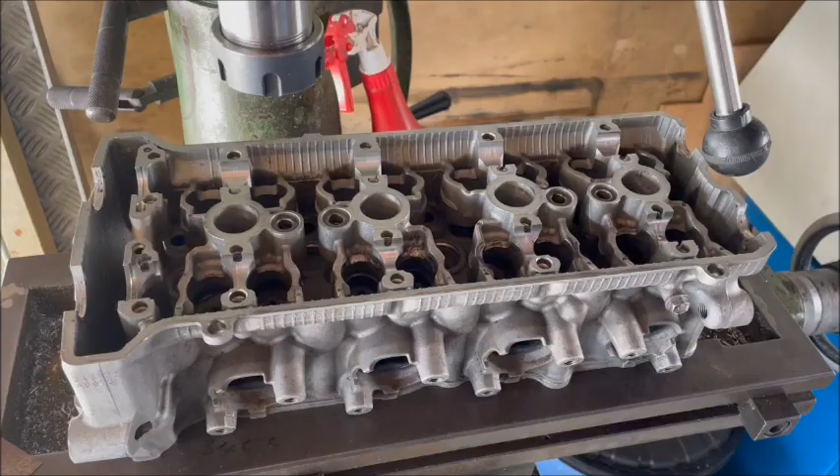So the next little job in the garage is to take 25 thou off one of these heads. Now this head's actually been damaged beyond repair and use, so I have it as a test piece. So the first thing I had to do was remove the damage from the face on the bottom here so it would actually sit flat on my mill, and as you can see it's about the size that this mill will take, and it won't take anything much bigger, but anyway it'll be able

to do it. So what I'm going to do is measure these bores where the cam goes, the bearing surfaces here, to make sure that the head doesn't have a bend this way. I've got to clock it up first. Once I've done that, I can then flip it over and take a cut off this side without clamping it down, putting a bend into it before I make the cut on this side.

So to make sure that with this head clamped onto the mill like it is, that I'm not imparting a twist in it, I've cut 3 little shims. These are 4 thou shims, so they'll go 2 at this end, 1 each side, and the other one will go on this end. So being supported at 3 points, it won't be twisted in any way, and I can make all the measurements. When I've got it flipped over, I'll do the same thing, mount it on 3 points.

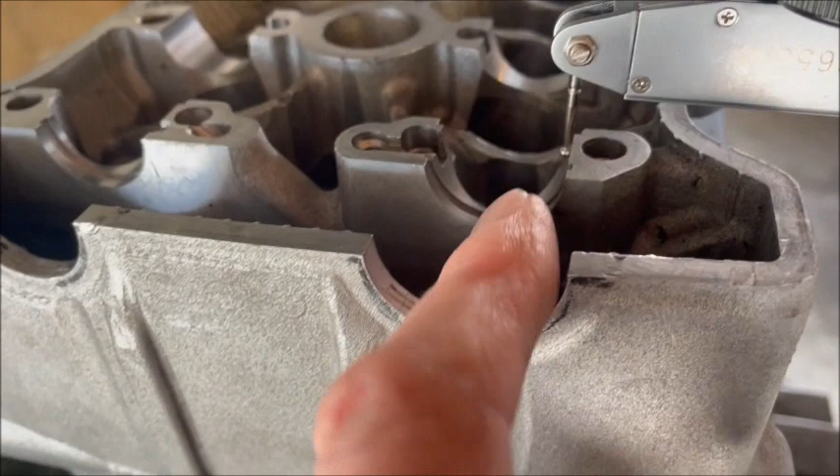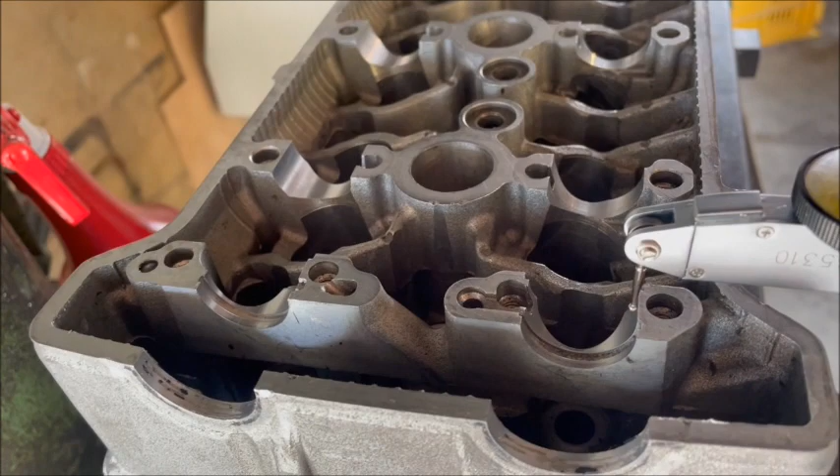Before I can check if the head is bowed in this direction, I need to get it lined up on the mill in this direction. So what I've done is got the indicator on this edge of the cam bores, so that basically it's on the vertical part of the bore or close to it. And so I've got it set to about 20, and if I move along to the other bearings,

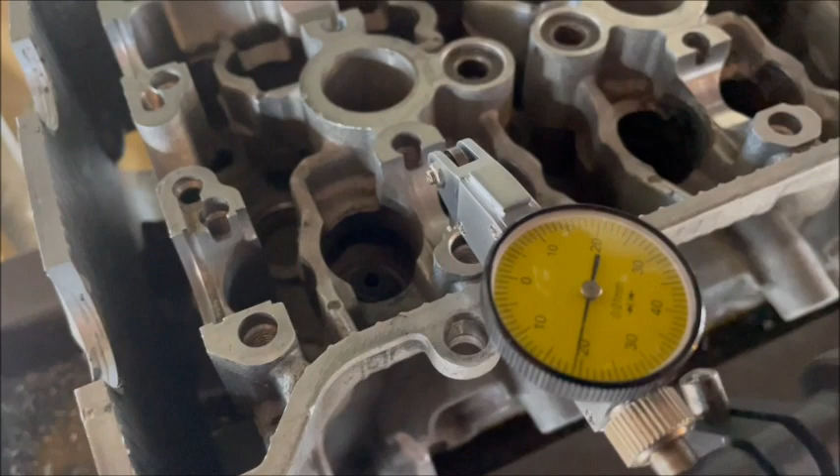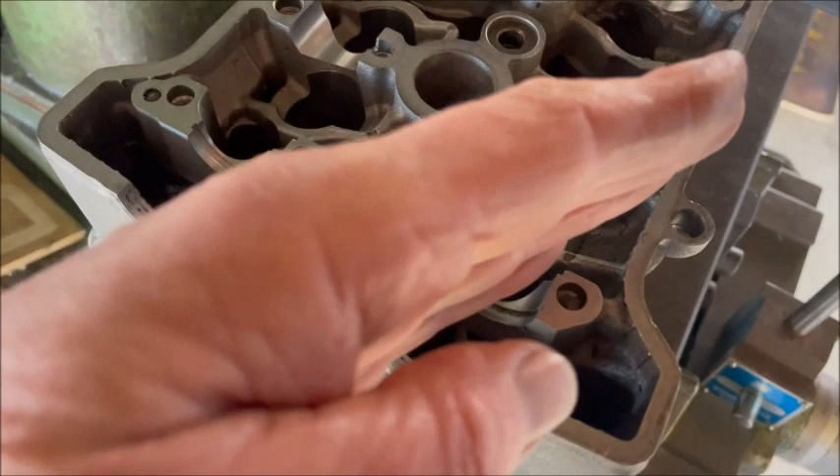it's a bit more gentle here, you can see lines up pretty good. It's not dead perfect, but for this purpose it'll be just fine according to me. Get to this one, won't bother going all the way to the end. I don't need to see the head traversing across my mill. So it's about 20 all the way along, so that's fine. So the next setup will be to measure the height of the bottom of these cam bearings, so that's why I had to get it perfectly straight on this bed.

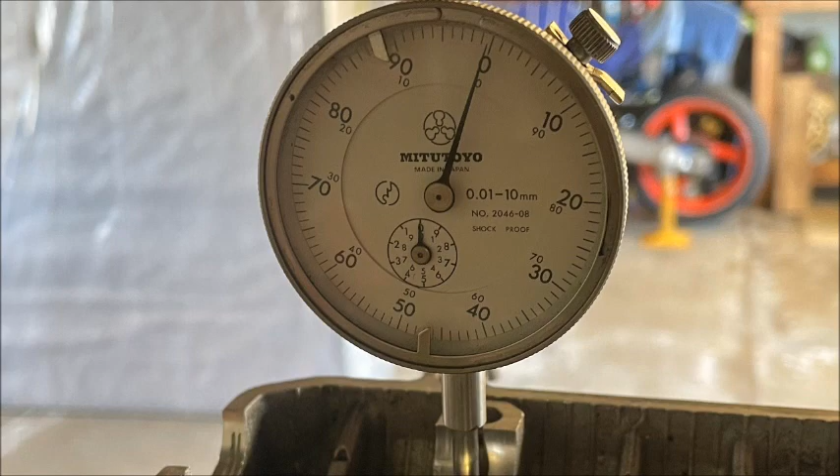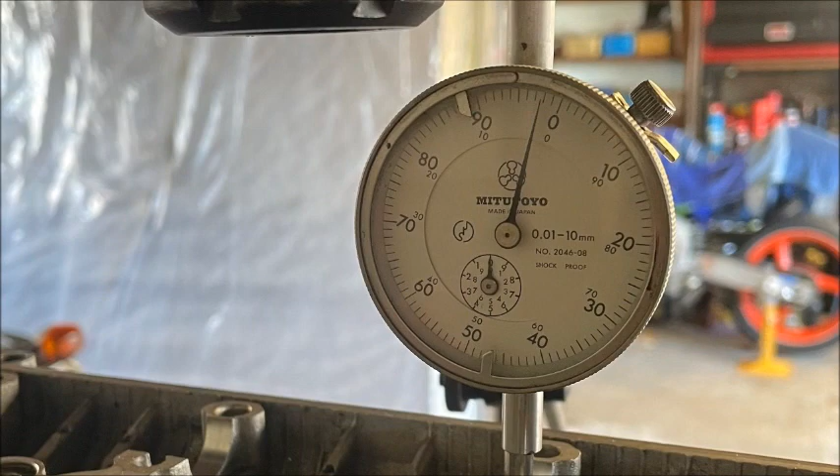In this first photo you can see how I've got the DTI on the bottom of the cam bores. These next photos are of the actual DTI reading in successive cam bores as the head is moved along. So as you can see, there is some slight variation in the gauge, but it's more caused by the slope of the cylinder head rather than a bend in it, so it's progressive.

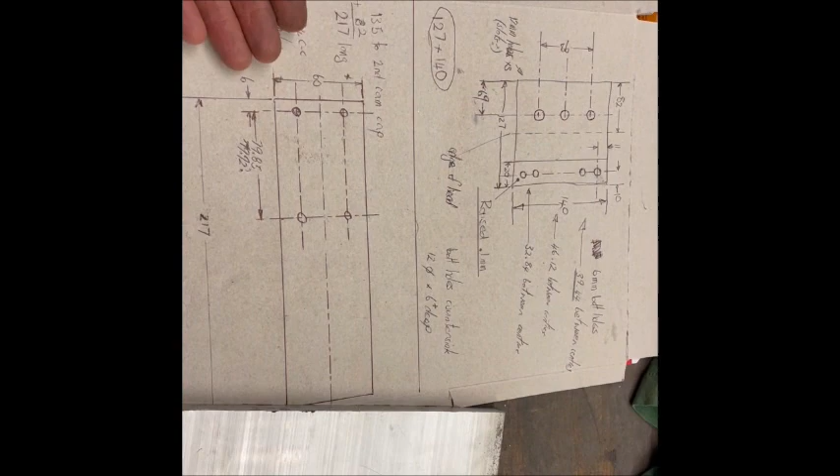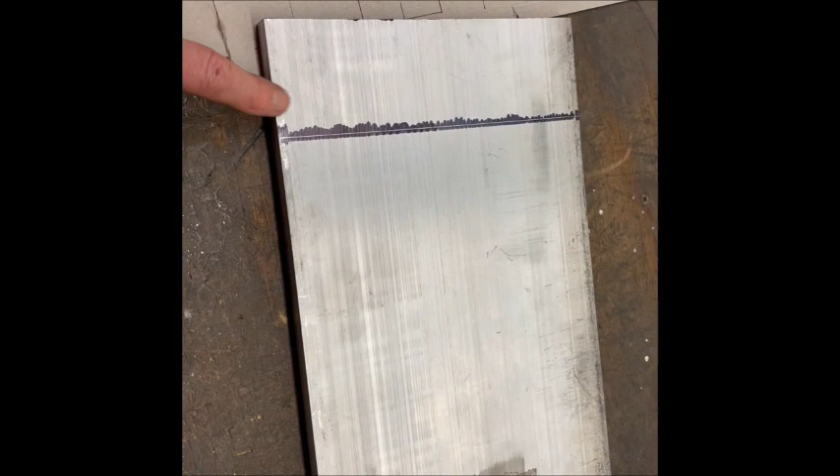All right, I've got a rough plan of the fixture plates I'm going to need to bolt to the head that I can then clamp down on my mill, which will hold it securely, plus also allow me to shim it up so it's all flat and level. So that's the basic drawings, one for each end. I've got a piece of aluminium plate about 12mm thick from my mate Kevin, so I'm just going to cut that off using my drop saw.

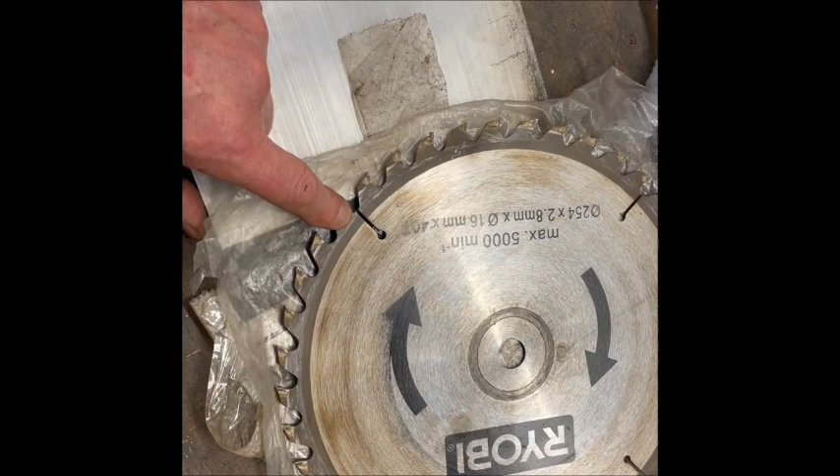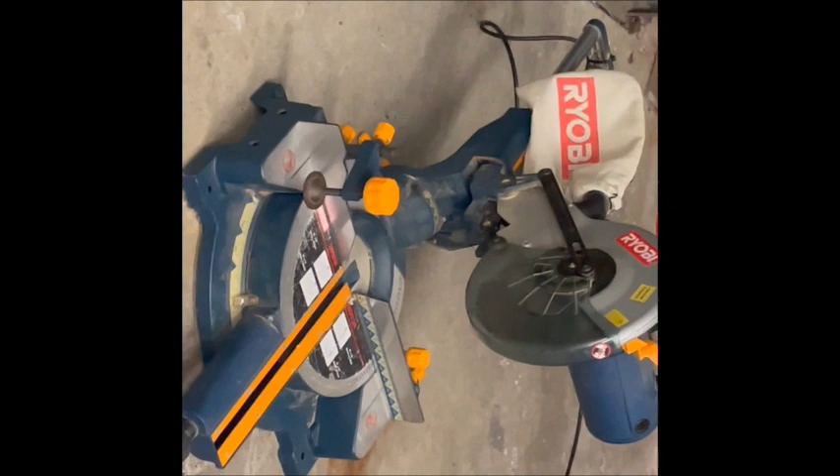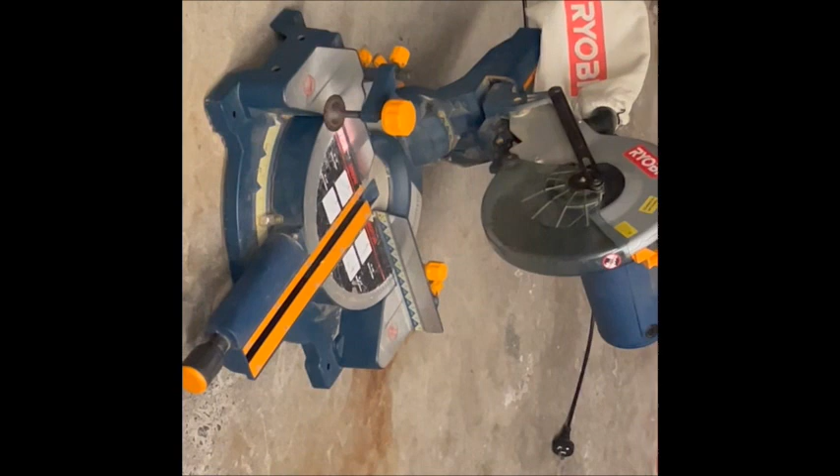And to that end I've taken this blade out, the 40 tooth blade, carbide tipped. I have used this before to cut aluminium, and now we've got a 60 tooth blade in this, and this is exactly what I'm going to use to cut the aluminium. Obviously it's designed to cut wood, but in actual fact it does a very, very nice cut on aluminium. Makes a bit of noise, throws chips all over the place, but does a good job.

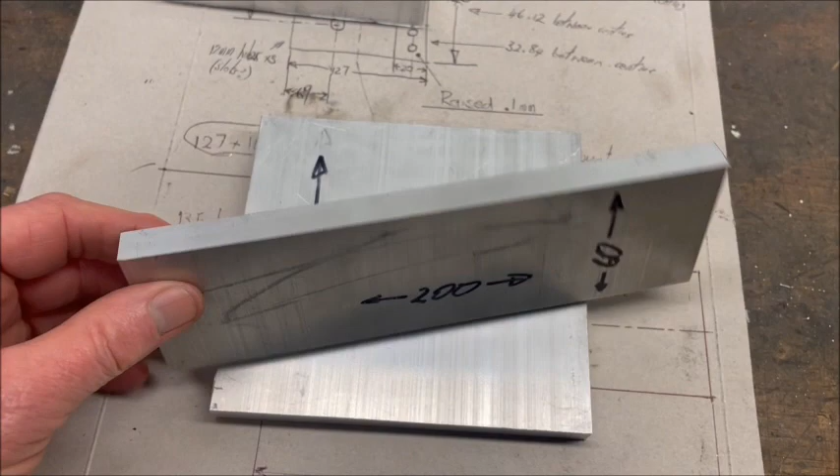You can set it up, clamp it down and cut away. Certainly easier and faster than hacksawing, and you get a better finish. Square, all those other good things. Anyway, see how it goes. I cut these two plates using my drop saw with a reasonably fresh 60 tooth carbide blade, which works all right. It does spread little chips all around the garage, but you know, makes a reasonable cut.

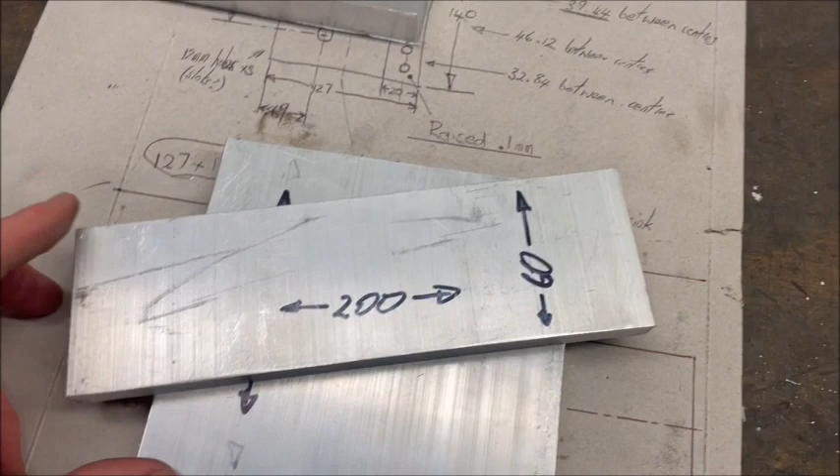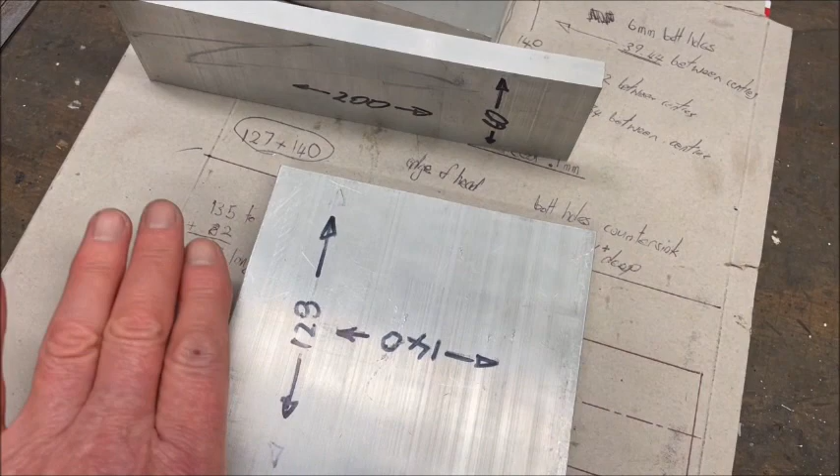Then I mounted them up in the mill and made the sides parallel, squared it up, all of that good stuff. Now while I was doing that, I noticed what looked like one end was not clamping down properly, so I had a bit of a look after I'd finished milling the last piece, and I found that the plate that this was cut from is not flat. So I've just spent a whole day more or less cutting these out, milling it all nice and square, only to find that I can't use them because they're not flat.

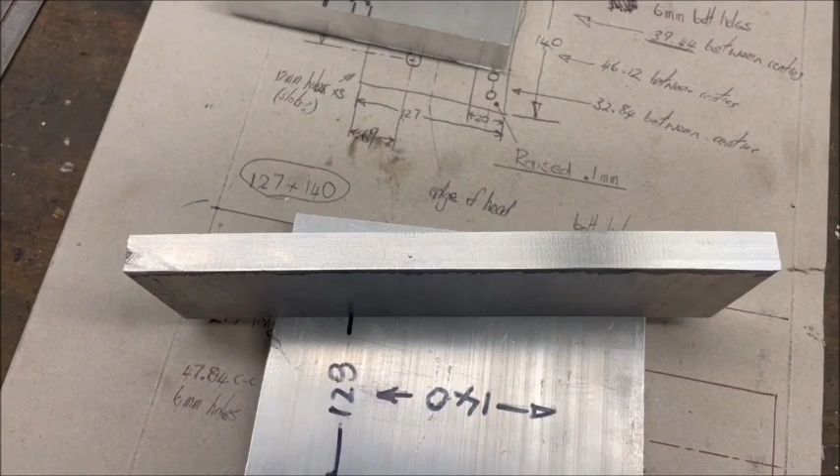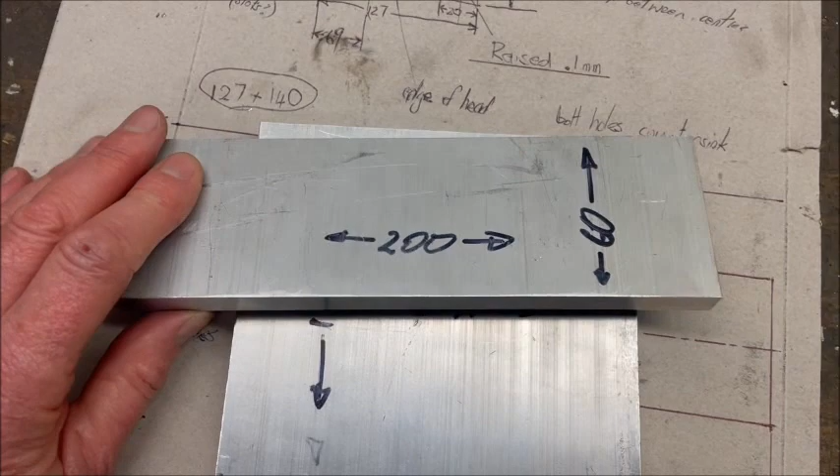I thought about borrowing my mate's mill and vise and just clamping it in on the sides and then taking a skim off top and bottom, but it's actually like 1 millimeter or so bow in these plates, so that would leave it a little bit thin in my opinion, so not very good.

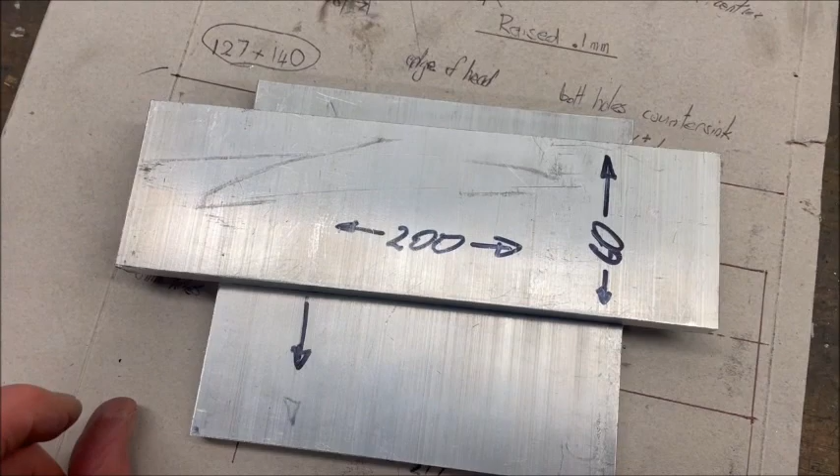The other way I could have done it was fit them up in the four-jaw and take a skim off, which would have made it flat on one face, and then clamp that down in the mill and cut the other side off using the mill to come to a particular thickness of plate, because they both have to be the same. Well, ideally they'll both be the same, because the GSXR1000 head is going to be mounted on top of these after they're fixed to the head.

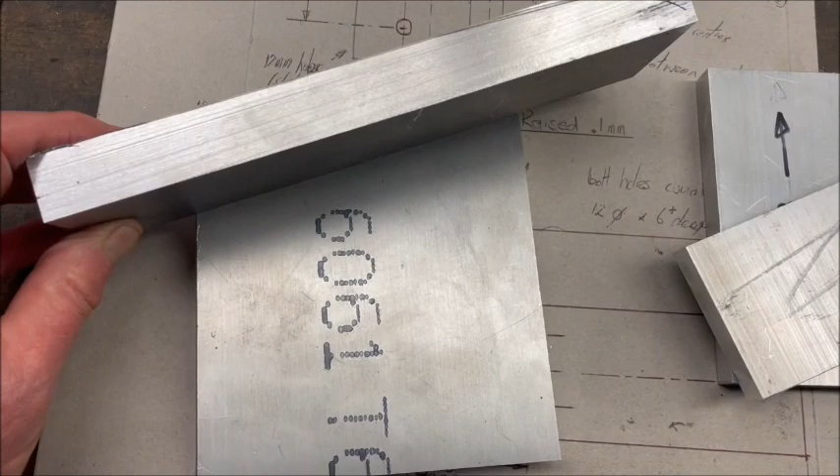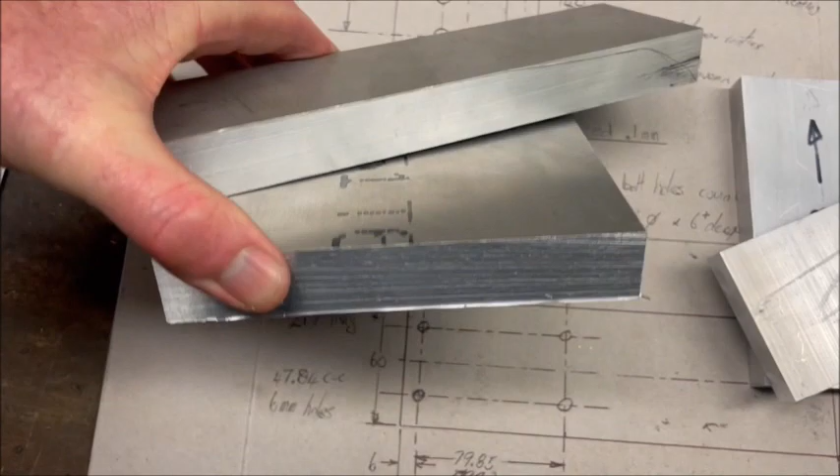Anyway, thanks to my good friend Kevin, I now have some 20mm thick plates, which I'm going to put in the mill. Now this is flat, just to square up and put a nice finish on the ends here. So basically starting again. We'll see how it goes.

I think this might be the end of this video. I will start another one once these plates are drilled and milled and basically ready to bolt to the head. Yep, and then that will be clamped into the mill.